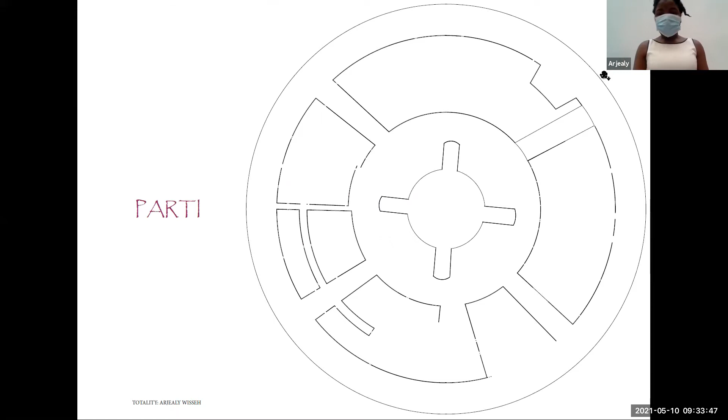So this is the parti of the overall campus that you're looking at. And this is the green inner space of that overall campus parti as well.

I had to consider many things when designing, because I was not designing for myself - I was designing for people of a different region, not within the West.

One thing I had to consider was conventional care versus non-conventional care. The reason is that within that region, money is lacking in a deep way, because of corruption, lack of infrastructure - both soft and hard infrastructure - due to corruption.

And for that reason, the work environment is not safe. So healthcare workers are unmotivated to go to work, and many people are unmotivated to join the profession. Therefore, Liberia lacks a lot of human resources within the healthcare sector, and for that reason, many people die. So how can we create a space that produces an effective and holistic healing environment that will allow infant mortality to decrease?

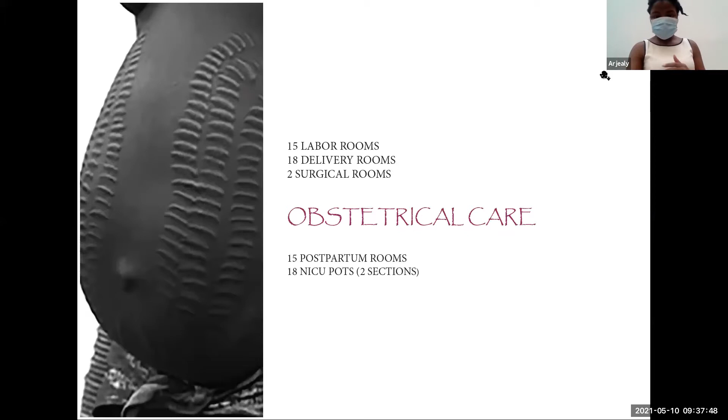So material, when I was thinking of material, I had to think of how to look at materials, how to cut costs as well. So we have to look at local materials first before you go outside.

So things like stones, wood, clay, sand - they're very readily available and easy to use to build the overall space. Then you have to look at the continent. Places like Egypt, Morocco, they make tiles, so that's easy for you to import, that also cuts costs as well. Paint, cement, and glass as well.

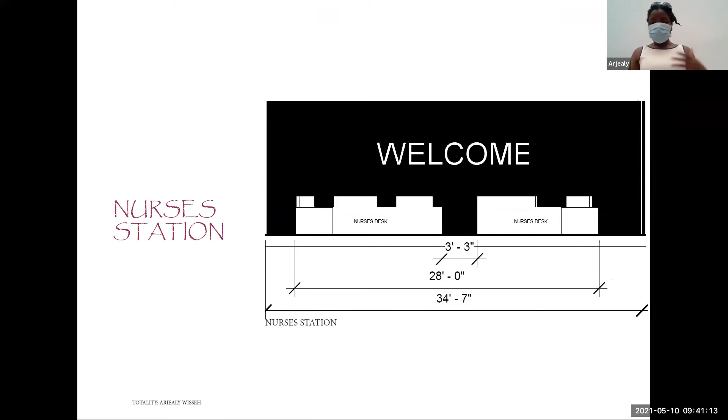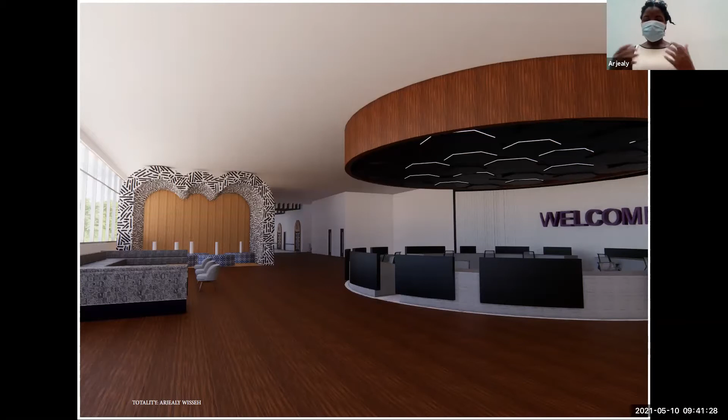So there's a way in which I decided to design the space to not totally remove the essence of what the hospitals are, but also look at it and see how you can renovate it and make it a little better than what it was.

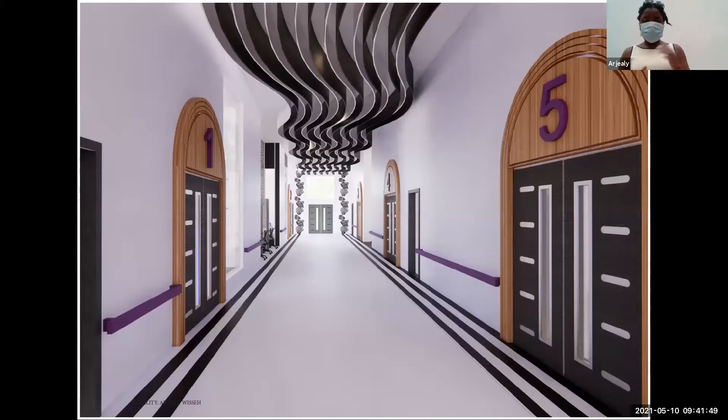So within that hallway, there's a hallway right on your left. This is the hallway you'll be looking at. You can see the rooms and the room numbers within that hallway, which is easily very clear and very easy to see. This is sort of like a wayfinding as well. And then you can see this rendering at nighttime as well.

Within that labor room, you can actually see the family area here. I created a family area where at night, these beds can be pulled out. They're pull-up beds, and they allow the family to be able to sleep over at night.

Now, many of these people are walking for hours to come to the space. So let's say someone is in labor and she has not dilated too much yet. We cannot say, you know what, you're not dilated yet, go home, right? So what's the most important thing to do? Create a space that the family and her can stay in until she's dilated enough, before she's moved to the delivery room, which is a very important part as well.

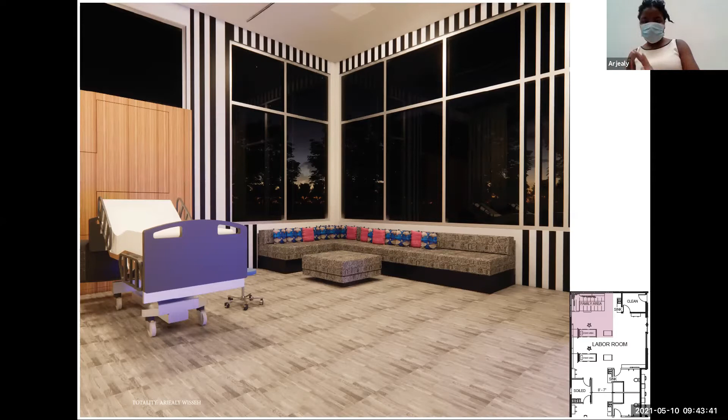So this is the rendering of that space. Again, I had to think about how to cut costs. So what I did was I used paint. We all know as designers, paint is the cheapest among all the classes within every material. So my goal was, how can I utilize paint to create texture and dynamic within the space? How can I utilize the cheapest material without breaking costs?

So there's a sort of traditional birth they have. It's not really a water birth, it's a birth where she sort of squats. It's called a squatting birth. So that tub allowed them, the shape of the tub also allowed them to pile it with a lot of cushion, and she can squat and the baby can be born. And also she has the choice to have a conventional birth as well.

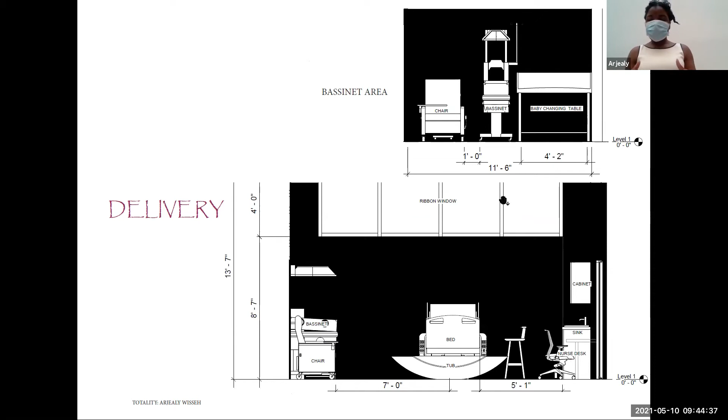And then you can see that overall, within the delivery space, because delivery is so private, you cannot have a window that people can see into. So what happened is we have this ribbon window that allows light to come into the space, but at the same time gives privacy to the room.

You can also see in that space, mommy and baby bassinet are very close to each other, the chair, which encourages skin to skin care, which encourages breastfeeding as well. Within that area, there's a baby birth, there's a baby care area.

One thing about this area, they love really their family. So when a woman had to have a child, she's not allowed to do much for almost 3 to 4 months. All the women in her family go to take care of that baby and make sure the baby is okay. All she does is breastfeed the baby and get up in the morning and take care of herself. So having that space helps them be able to accomplish that within that space as she's there.

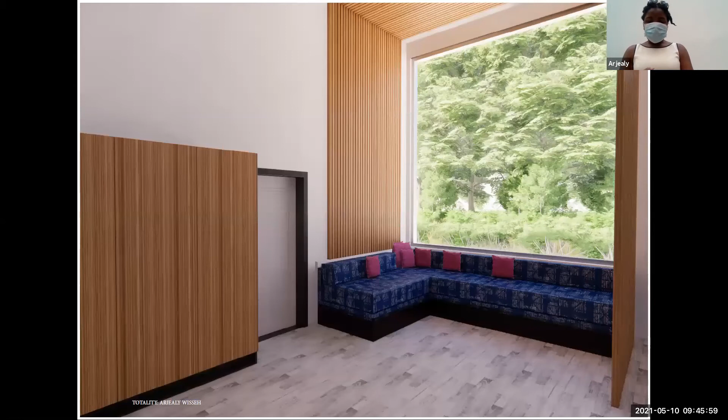Also, this is the family area. Very simple, very clean, natural wood, using the natural wood in the area to also cut costs as well. And also this unit is a built-in unit. This is where we're going to use a lot of craftsmen within those seating to have those built-in units to cut costs in that region as well.

So this is the baby area as well, which a lot of these things can be built within that region. A lot of these things can be manufactured. People have these skills, but they don't use them because they don't feel like they're important.

So there's something I really did within the bathroom. There's a special care, an unconventional care they tend to do, called the steaming pot. Whenever they have babies, they do this thing called steaming. It releases blood to avoid blood clogging within the body. So they will sit over a steaming pot. Having a built-in steam pot, they can put herbs in this pot and steam to actually allow that blood flow. So that special feature is placed in that bathroom.

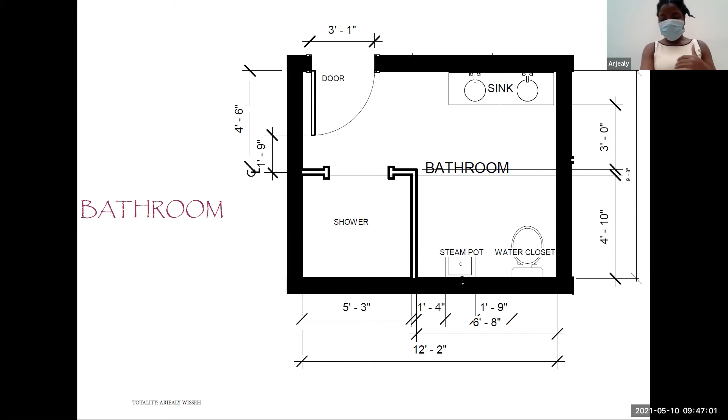So for the NICU, I decided to go with a pod NICU instead of an open ward NICU. There was research done at the University of California that shows it is hard for babies to recover in those open ward rooms because it's very loud noise, and mom also worries as well.

So the goal of this space is to actually still keep family interaction. Mom stays, she doesn't have to go home too much all the time. She stays and other family goes home to get stuff. And while she's here interacting with baby, mom and dad, you can see right here, there's a pull-out bed as well, the couch as well that sits. And you can see within the space there will be 2 sections of this.

Within the space, there's 3 babies in this space as well, allowing family to have privacy to interact with babies. This space also allows family members to come sit and talk, basically share ideas, share information on how to better the health of that prenatal or low weight baby, as well as how to empower themselves to become mothers and fathers.

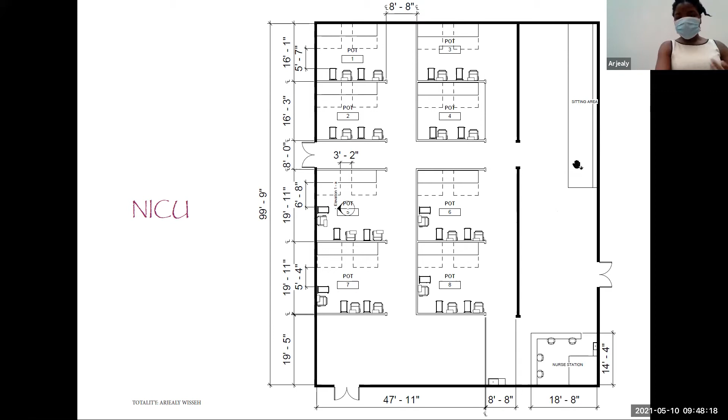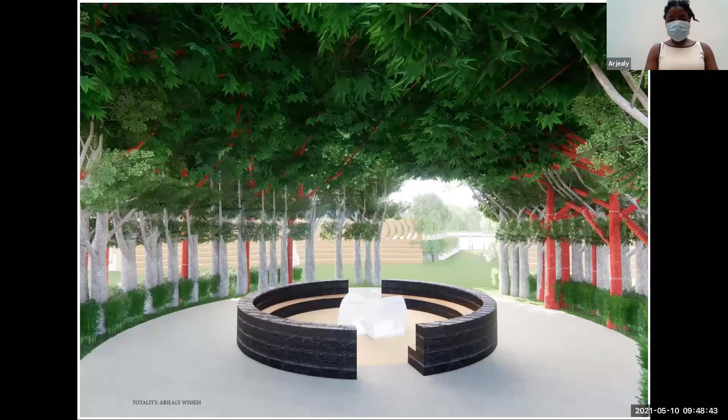So this is the daytime rendering of that community space. It's the largest space, but I just sort of spot render. The reason why is because in that area, they love to meet, they love to sit, they love to have conversation. At night they will be coming here to actually talk. Many of these women will leave their rooms and come here to gather and hang out with each other in large numbers.

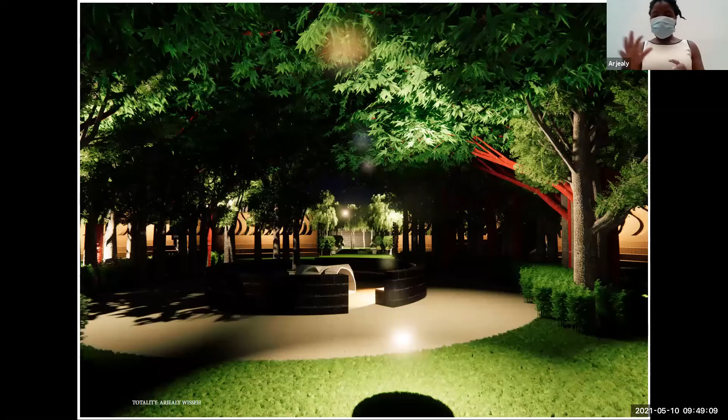This is the nighttime rendering of this space. You can see how it's going to look, with tiki lights put everywhere to cut costs as well, because they cannot afford conventional or electrical lighting. So this is another nighttime rendering of that spot as well.

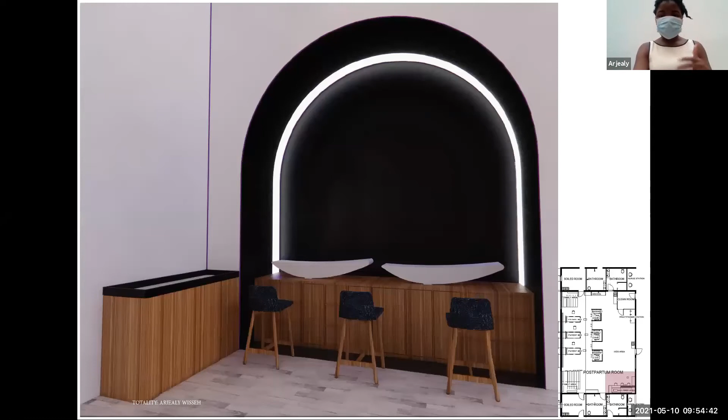It has to be accommodated for them, having that pulled out bed and also having the space. The rooms, since there are three within the room, are pretty large sizes, about 54 feet by 28 feet, if I'm not mistaken. So they're fairly large rooms to accommodate that kids area. During the daytime kids can run around, or if mom wants kids to rest, kids can still be in that space, because they do bring the whole family. When I say the whole family, I mean the youngest kids will come along with them as well.

Is it predominantly a matriarchal society in that they would bring mostly women along, or would the men come as well? It's predominantly a matriarchal society. So when it comes to birth, women are much more involved within the birthing process, and men come in later. When the child is a little bit older, men start to take another role, the role of provider, the one who literally provides the meal, the food, the money for the baby to be healthy. But later on they come in with that touch processing as well. At this point in the process, it's really based around the women and the female.

And so you've laid out your plan in a series of modules. This postpartum room is a good example of that. There's a series of modules here separated by some support spaces. Was there research or thinking in particular that led you to the idea of 3 beds in these spaces and 3 isolettes in the NICU stations? What helped you break down that module?

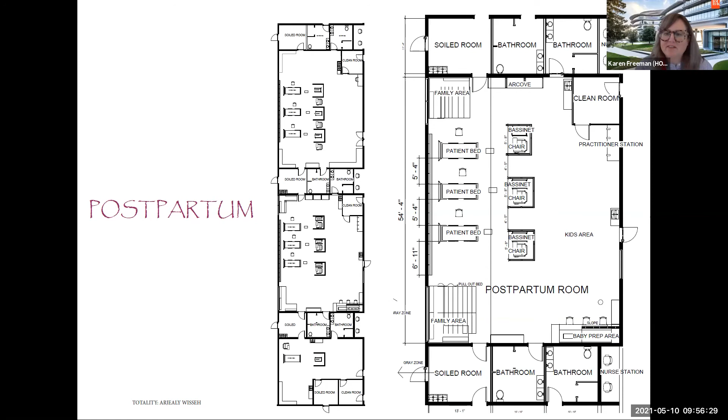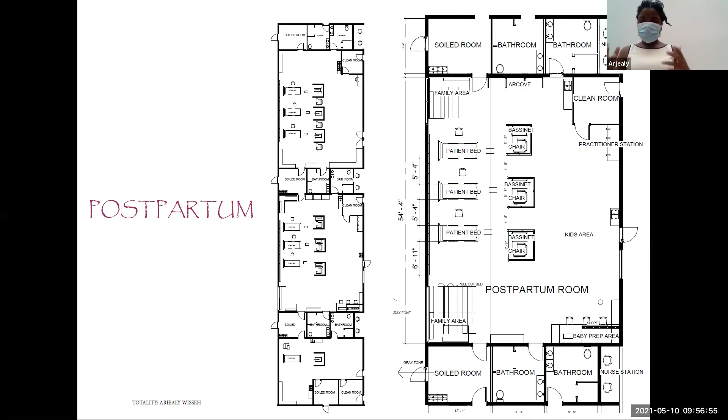This module was actually based on that idea of community. They like to be together, so having them separated would prolong the healing process. Even within the labor room, when people are there and she's in pain, it takes her mind off that pain, so she can communicate with them. But the delivery module is quite different, because it's absolutely supposed to be sanitary, so it's not really family oriented, but it has a space for one family, because women tend to stay one night and then move to the postpartum ward. The idea is to keep them in the same space, in that community space, where they still feel like they're within that communal space. That was the idea behind it, based on research within the region as well.

And then in your NICU space, you talked a little about some of the needs of the child itself, the infant, and their development. Infant development follows a very specific process. It really starts with that tactile, so you've addressed that with the kangaroo care, ensuring there is this skin to skin relationship. Then their development moves through the vestibular, establishing their balance and their sense of space and awareness and how their body moves in that space. And then auditory, and finally visual, which is why a lot of these spaces tend to be quite dark, to allow the baby to move through those three steps before they move into the visual stage.

Tell me a little about what you think as far as finishes and lighting for those NICU spaces and how that might help a baby's development. Within the lighting area of the NICU, there was research done that proved babies who are in pods tend to heal faster, because there's less nurse overwork, noises are not overly loud, and mother and family don't feel uncomfortable touching the baby in that space. What I was thinking was low lighting, because harsh lighting, even for us as adults, can be very intensive.

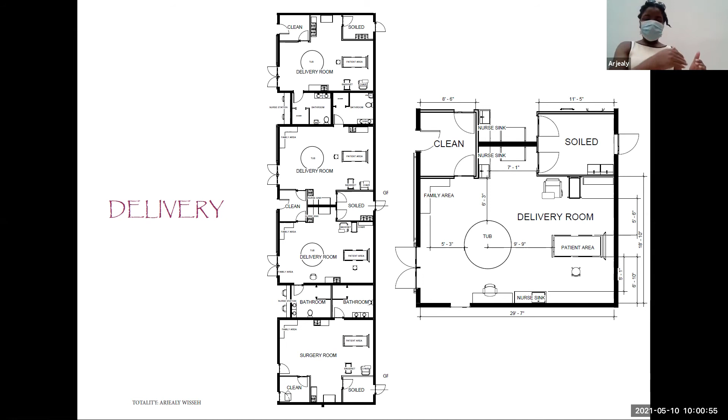It was just built with the idea: if we can make a long hallway, we can walk through that hallway and be able to see patients. So my hope is this can become a model where it develops more and more, and becomes something that can be used across the region. It can even go all the way, because Sierra Leone also needs this, as well as Ivory Coast. They need this, and all those people in this region are the same exact people - same language, same culture, same dialects, same identity. So hopefully this can be something built across the region.

One final question. You've moved into this level of detail very quickly, which is wonderful. Could you take a moment and walk us through the flow of the overall floor plan? And while doing that, talk a little about how the circle might be used to help keep both the patients and the staff members safe.

Can you speak up, please? Can you repeat that again, please?

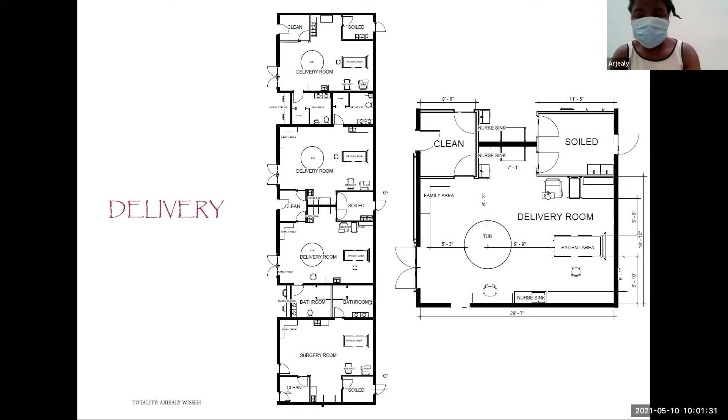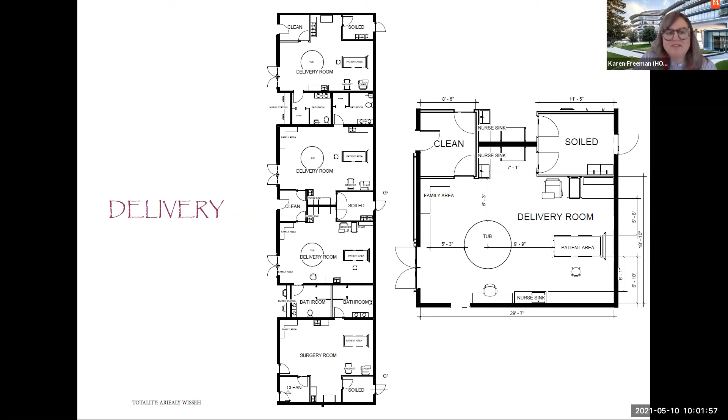Sure. While you're looking at that overall floor plan - the circle is a very historic form when it comes to safety. And you talked about the safety of the patients as well as the staff members, and maybe even concern for staff moving into healthcare. I think using the circle is an excellent way to combat some of those outside concerns. So if you have some thoughts about safety as you walk through that floor plan, I'd love to hear those.

Okay, gotcha. So I will go back to the overall floor plan. Sorry, it takes a while. I always get stuck in this area.

Within this area, you can see that barrier where it creates that ring, that sort of barrier around it. The compound becomes its own separate entity within the area, within the region itself.

Through here, this will be the entering level. Here is the prenatal area, and right next to this prenatal is the dispensary as well. You can see that area where vans can park to bring in medical supplies. Right in this area as well, I was hoping to add a little pediatric space attached to that prenatal care.

And then right here, we see that laundry area. This will be the gray zone where all the soiled materials will come through and dump out, and then come in to the laundry, going to the laundry area.

Here, within the space right here, this is labor, this is delivery, this is postpartum. One of the biggest things I hope for as I develop more and more - my goal is to really develop this project over the next three years - is to also create outside spaces.

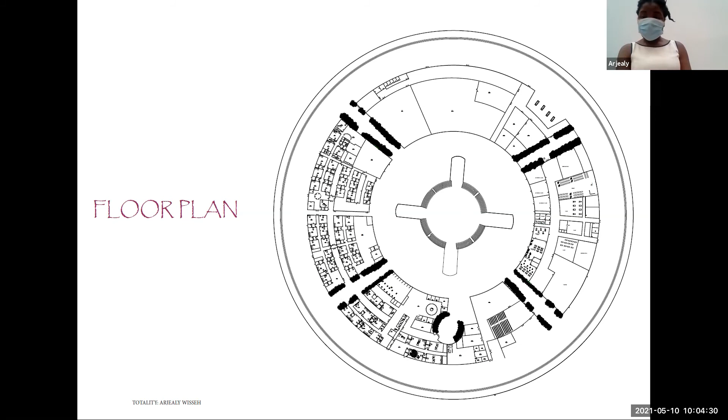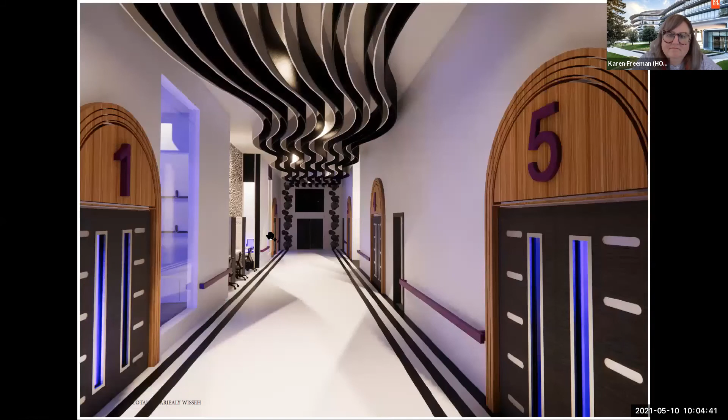Also, there are individual live nursing stations, which I'll bring closer to that floor plan. You can see it right here within that space, which allows the nurses to see what is happening within these spaces, right out the windows, right out the doors, which allows them to see within the room and to be able to, if a family member needs to call them in quick, wave their hand and say hey, there's something going on, instead of them waiting to pass through or having the family member go out as well.

So having these individualized nursing stations makes it very efficient and sufficient for nurses and doctors to be able to do that job effectively.

Excellent, thank you so much for that. I really appreciated your presentation. Thank you.

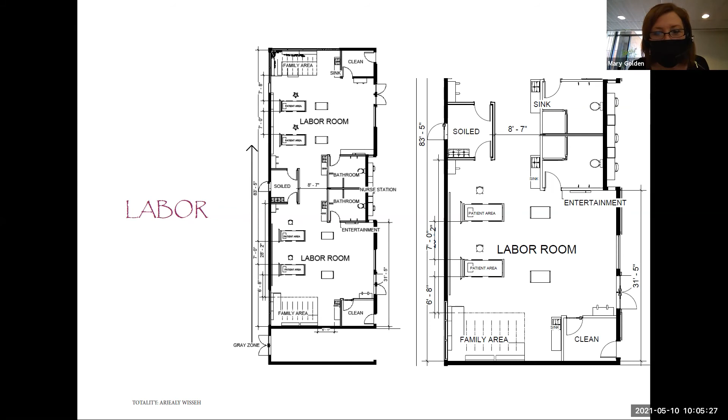Rodolfo, we will open the floor up for your comments. Thank you, Karen. Well, thank you very much, Arjealy, for the whole walk through your process, your thought process, and what inspired you to make all of these decisions.

I'm very curious about a few things. Since from the very beginning, it's really exciting, all of the possibilities in textural components, in how to apply very local craftsmanship, and it's such a rich culture, and how that can be translated into healthcare, which is, for me, fascinating. Starting with the black color, to understand that it's the opposite of what we normally believe. It's fantastic. I think it's really, really interesting from a design perspective, because we're used to do the opposite, right?

So I'm very curious about two things. Number one, and Karen touched upon it, it's the use of the circle as a floor plan. When we see the overall floor plan, you can literally see the warp of these rooms, and how these rooms are not orthogonal itself. So I'm super curious on how that circle will help you convey the message that you want to bring with the addition of cultural elements there, right?

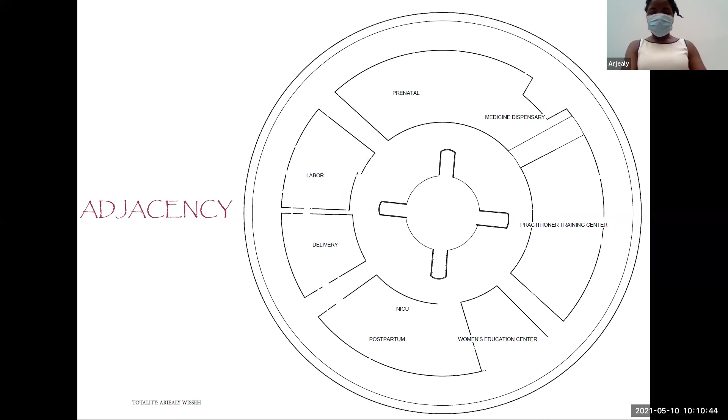Also, you spoke about the separation of spaces. Definitely, that's something I was thinking to a certain degree. There's some level of privacy while still creating community within that space as well. That's something I would have to work into the space, because I think it's very needed. Though they're very communal, there are times when privacy is absolutely needed.

And then the last question, if you can please repeat the last question for me too. I can't remember the last question. No, I was curious about how you thought on the experience from this mom-to-be, from a very rural context into this very black and white, super contemporary clinical environment, and if you thought on these possible frontiers through the space that can help her make up her mind on, okay, I'm going to give birth.

So the reason why I did it, a hint of cultural identity is within the space. One reason is because it's such a medical space, and if it becomes too textural, it becomes harder to see dirt and things. So the reason for the clean spaces was basically sanitary. Within the rural area, they don't really use texture in that overall space, only in objects like the pots and the clothing. That overall space is just open spaces. To create that, I thought of the homes, the rooms, the kitchen versus the living room, and how it flows in. This is how I thought about the space as well, which is very open, very large. It's just very plain, but usually the texture comes within the pots, within smaller objects.

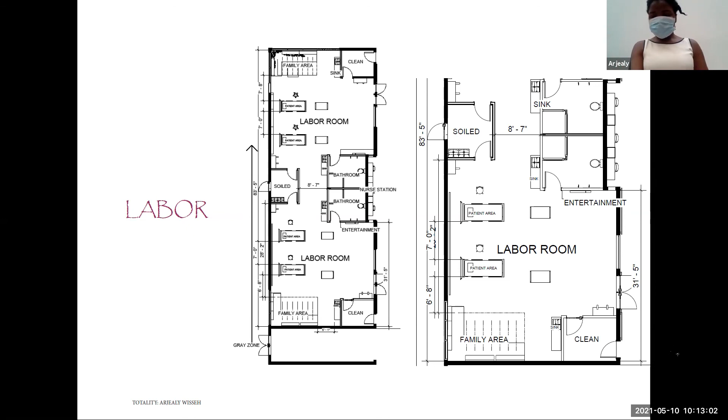Okay. Great, I love how you synthesized your presentation, which is a big congrats for that. Thank you. Yeah, awesome, congratulations. Thank you so much, Rodolfo. Thank you, I couldn't have done it without you. Thank you very much.

These are great questions, and we have a few extra minutes. Karen, if you'd like to ask anything else of Arjealy. No, I don't have any other questions. I do want to echo Rodolfo's comment that it was very well presented and very organized in your presentation. You led us through it systematically, which was very helpful as an audience member. Thank you very much, Karen. Thank you.